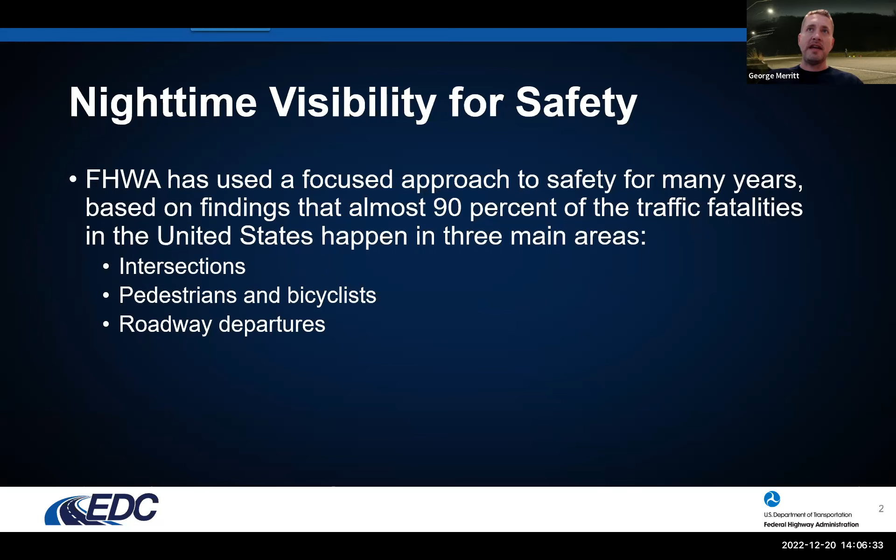I wanted to quickly highlight what we're trying to accomplish, hoping to get engagement from folks on this webinar. The Nighttime Visibility for Safety Initiative addresses another part of the roadway safety problem. Federal Highway Administration has a focused approach to safety, concentrating on three main types of safety problems: intersection safety, bicyclist and pedestrian safety, and roadway departure safety. Combined, these account for about 90% of all highway fatalities in any given year.

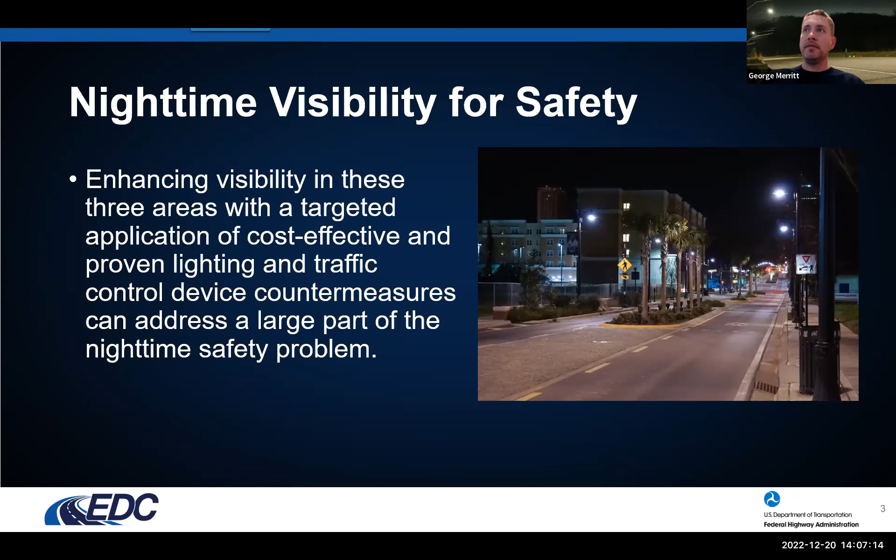This initiative is trying to come up with cost-effective and proven strategies to improve safety in all three areas. We're going to be very targeted, ranging from additional or enhanced traffic control devices all the way up to targeted lighting solutions, taking advantage of modern technologies in roadway lighting for specific environment conditions. We believe improving visibility along corridors, at intersections and pedestrian crossings, will help reduce nighttime fatalities, particularly for bicyclists, pedestrians, and other vulnerable road users.

We are really trying to get these kinds of strategies and countermeasures out there, ones that will be low cost in most cases and relatively easy for any agency to apply in a specific location where the risks might be higher.

It's taking place February 14th through 16th. The website is a little tricky to find on Google, but I strongly encourage anyone with an interest, particularly in nighttime visibility, to register. If you're not already working for a state Department of Transportation, we'd really like to encourage you to reach out and work with your state, as well as collaborate with Federal Highways through the EDC 7 initiatives.

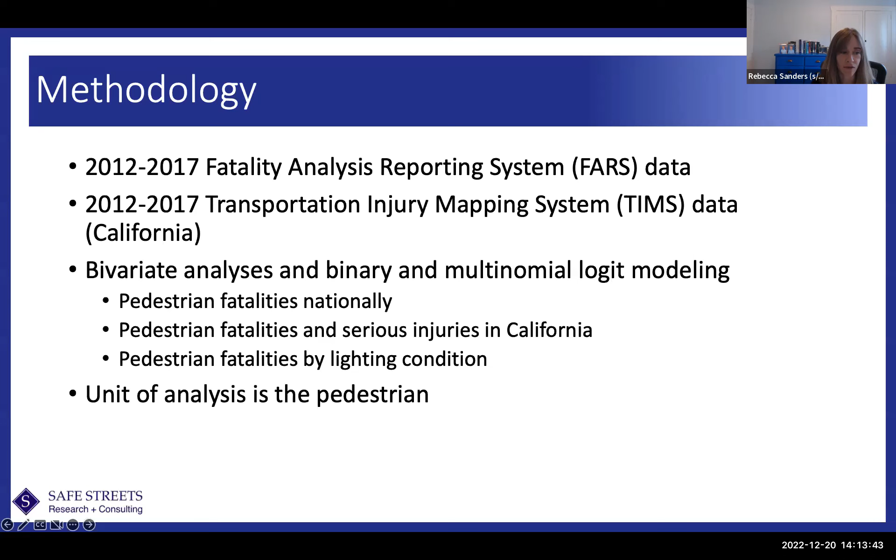And then for pedestrian fatalities and serious injuries in California, using that TIMS data, we also did those models separately to look at whether there were differences between the two, or whether it was pretty consistent when they were pooled. We also looked at that FARS data by lighting conditions, in comparison to a baseline of daylight: dark lit conditions and dark unlit conditions. For all of these, the unit of analysis was the pedestrian.

So just getting straight to the findings, we found some pretty strong, significant correlations with darkness and characteristics of roadway design.

For roadways with 4 or more lanes compared to roadways with 3 or fewer lanes—a variable only available in the FARS data, which is why there's a US after it in the parentheses—fatalities were 1.2 times as likely to have occurred in darkness as compared to daylight.

State highways, a variable only available in the California data: fatalities associated with state highways were 2.1 times as likely to have occurred in darkness as those in daylight, and for serious injuries, it was 1.8 times as likely.

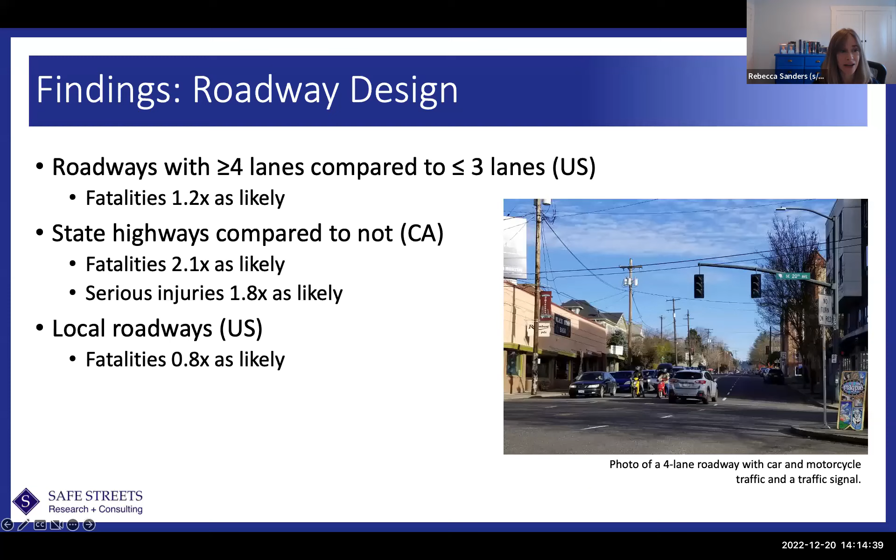Keeping with that trend, local roadways were less likely to have been associated with fatalities that occurred in darkness versus daylight. That makes sense based on what we know about design and speed, but it's also nice to see that our results are consistent.

In that same vein, we looked at speed limit and speeding, and it's important to distinguish between the two. I think we often think of speeding as an erroneous behavior we need to address, and it definitely is. But what we found is that the results were actually stronger when we just looked at posted speed limit, which is not a behavior—it's part of our operational design.

Compared to 25 miles per hour, fatalities that occurred at 30 to 35 miles per hour were 1.5 times as likely to have been in darkness versus daylight, and that increases when we look at those that occurred at 40 miles per hour. This was one of the areas where, looking at lighting conditions—dark lit versus dark unlit—we saw a very high odds ratio for those fatalities at a speed limit of 40 miles per hour or higher in dark unlit conditions in particular. So speed limit matters, and the way we design our roads matters.

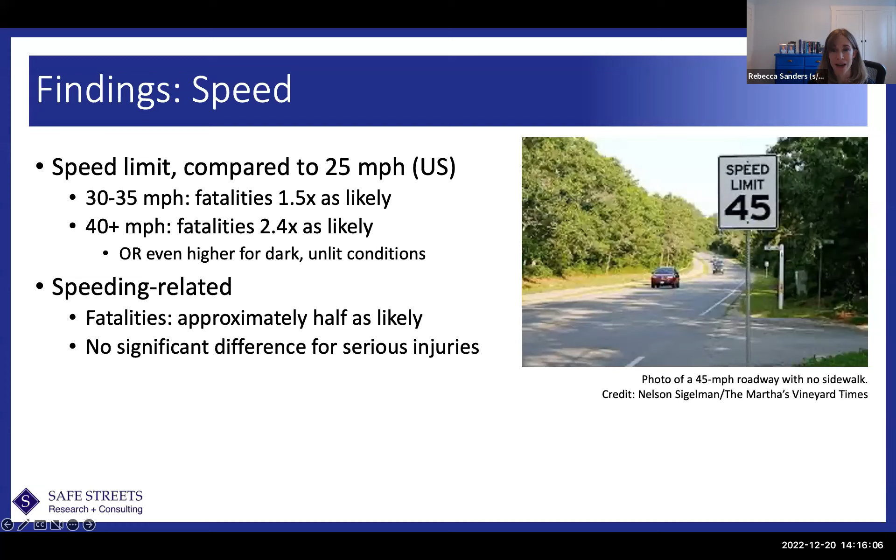Speeding does also matter, but we did not find a significant difference for serious injuries between speeding-related crashes that occurred in darkness versus daylight. Actually, we found a lower likelihood of those crashes having occurred in darkness. Again, this doesn't mean speeding doesn't matter—it does—but our speed limit matters quite a bit, and the way we design our roads matters quite a bit.

We also looked at other parts of operations, such as having a functioning traffic control signal versus not. This variable was only available in the TIMS data, and we saw that a functioning traffic control signal, when associated with a fatality or serious injury, was actually associated with a lower likelihood of that having occurred in darkness versus daylight. There's some sense in that, in a couple of ways.

First, remember that all of these are multivariate models, so this is after we've controlled for all the other things that might have mattered more or less. A key aspect of darkness seems to be, surprise surprise, we just can't see as well. And when we can't see as well, we cannot detect information as quickly and cannot react as quickly. So if you're forced to slow down because of a traffic control device, that actually allows you to detect and react more quickly—making it less likely to be associated with a fatality or serious injury in darkness.

We also looked at whether the crashes occurred at an intersection. We did not find a significant difference between fatalities, once we controlled for all the other factors, in darkness versus daylight, though there was a marginally significant difference there for serious injuries.

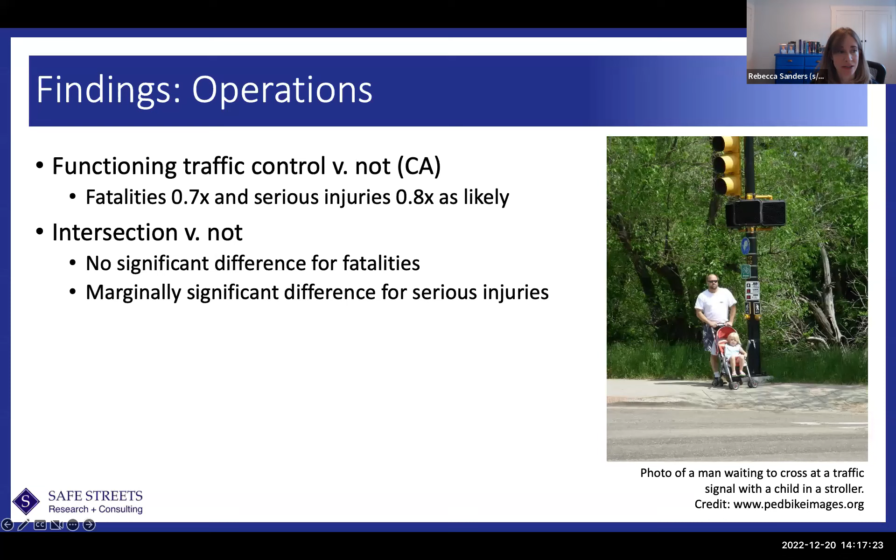In keeping with the same train of thought, we looked at driver movements, particularly drivers going straight versus turning. For all of the models, we found a highly significant association between the driver going straight and a greater likelihood of the crash having occurred in darkness versus daylight. This makes sense to me from a visibility standpoint—what signs are you getting to slow down? When turning, you're forced to slow down somewhat. When driving straight, if nothing else tells you to slow down, you won't, and you may be going too fast for conditions, even though as a profession we design those conditions, and you can't detect and react in time.

We also looked at pedestrian location and behavior. In particular, we looked at pedestrians crossing not in a crosswalk versus in a crosswalk.

Specifically for California, there's another level of that variable looking at whether the pedestrian was in the roadway versus the crosswalk. In both cases, we found a significantly higher likelihood of the fatality or serious injury having occurred in darkness when the pedestrian was not in the crosswalk, or in the roadway as compared to the crosswalk. Thinking about where crosswalks tend to be located at intersections, or other things helping to influence the driver to pay more attention there, there seems to be some protective effect, although this needs to be further investigated.

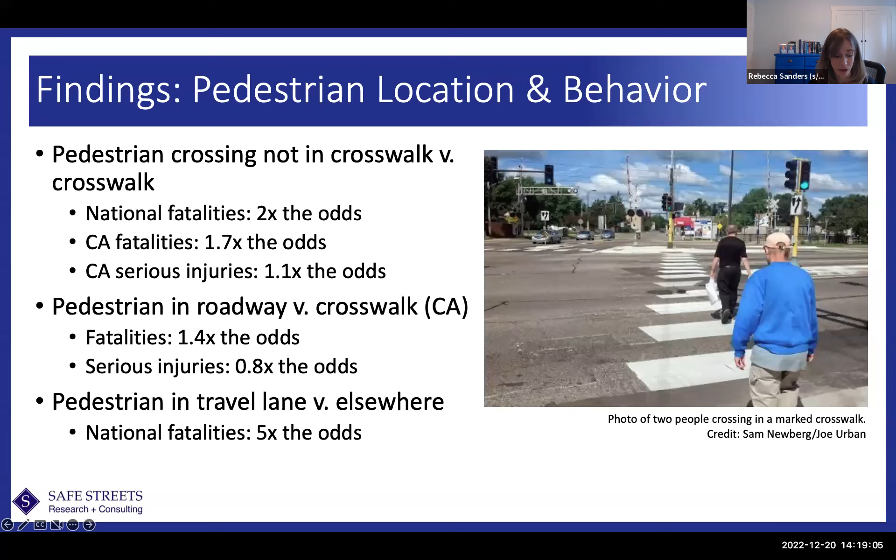In the national data, there is a variable that looks at whether the pedestrian was in the travel lane versus elsewhere or in the roadway. If the pedestrian was in the roadway, that is associated with a much higher likelihood of the pedestrian having been killed in darkness versus daylight.

Other pedestrian and driver characteristics showed up as significant in the model, and we think these are often really related to exposure. Compared to a baseline group of age 16 to 64, pedestrians younger than 16 or equal to or greater than 65 were much less likely to have been associated with a crash, fatality, or serious injury that occurred in darkness as compared to daylight. That makes sense when we think about who tends to be out in darkness, right? It's not generally our younger kids, and it's not generally older folks, who there's a lot of safety guidance saying it's harder to see at night, it's better to not be out. That's not the case everywhere in all places, but in general, that is what we see from the model.

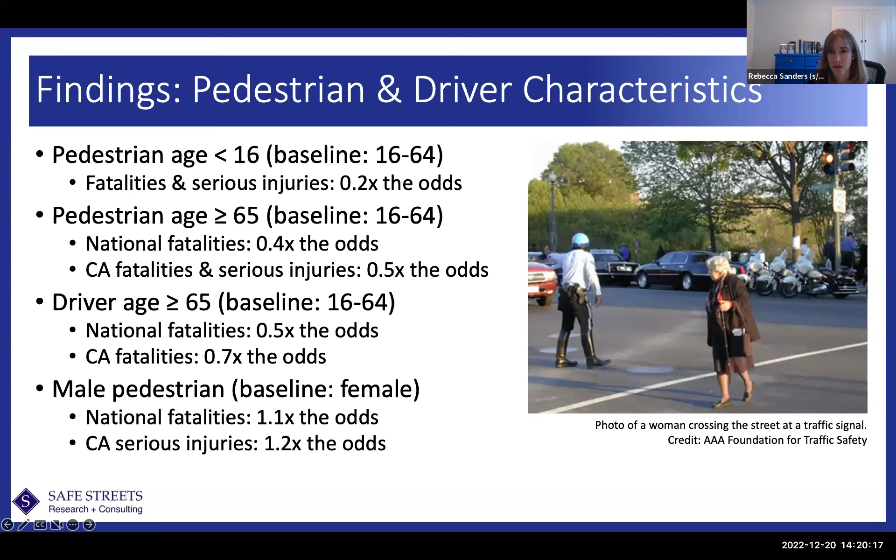A similar result for drivers age 65 or older — they're less likely to be associated with a fatality that occurred in darkness as compared to daylight. Male pedestrians, the same thing: compared to female pedestrians, males were significantly more likely to be associated with a fatality in darkness versus daylight at the national level. We did not find a significant difference in California for fatalities, but we did for serious injuries. Again, a lot of that is probably exposure related.

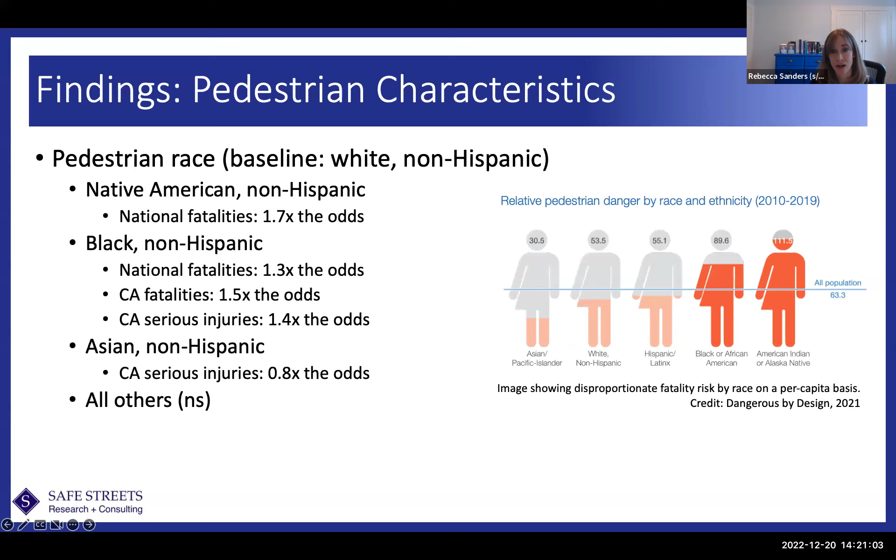We also looked at pedestrian characteristics in terms of race, and this is not a new finding — others, such as Dangerous by Design and other research, have found that some groups in our society are at significantly greater risk of being involved in a traffic fatality than others. Particularly in darkness, we saw this with Native Americans and Black non-Hispanic Americans compared to white non-Hispanic Americans. Those pedestrians who were killed — Native Americans and Black non-Hispanic Americans — were significantly more likely to have been killed in darkness than in daylight. We saw a maybe counterintuitive, or opposite, trend among Asian non-Hispanic pedestrians in California, for serious injuries only.

We also, as you might not be surprised to hear, found a significant correlation with alcohol usage, both on the part of the pedestrian and the driver, as well as with hit and run. All three of those being more likely to have been associated with fatalities and serious injuries in darkness as compared to daylight. Again, there's some exposure and collinearity happening here with the fact that alcohol usage is higher at night, and hit and runs are associated with alcohol usage as well. So we're seeing some of this just being an overlap — this is more likely when that behavior occurs. Nonetheless, it's still important for us to understand it as part of the puzzle.

We also saw a negative association with crashes and fatalities that occurred in clear weather, for those that occurred in darkness versus daylight. This makes some sense, right? If you're driving at night and it's dark, it's hard enough to see.

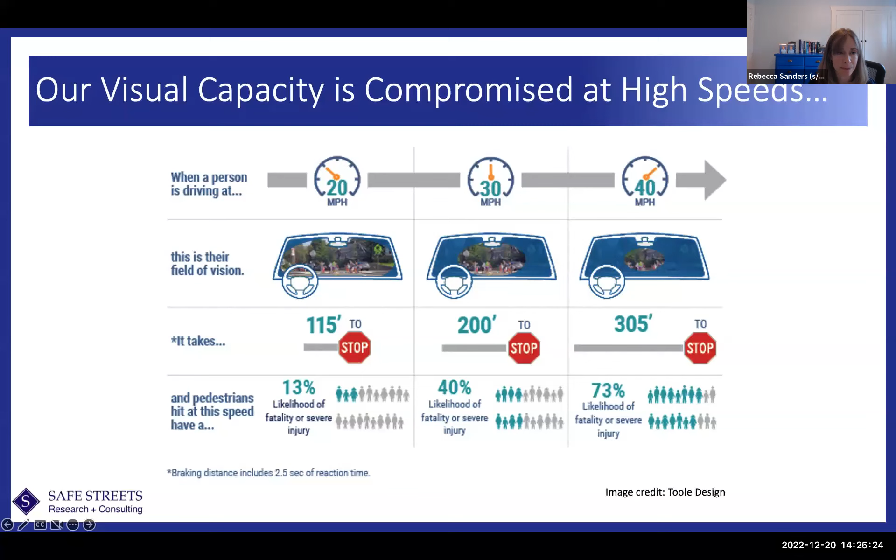And this tends to be even more the case in darkness. 90% of our information intake is visual, and essentially at night we are driving with a curtain around our eyes. So we are really missing that critical peripheral vision information that can come in daylight but can't come in darkness, except for, as we'll hopefully hear later in this presentation, how lighting can mitigate that loss for us.

So some key takeaways for us: we need to adapt practices to treat pedestrian safety specifically at night. We need darkness to be a use and design case, if not the use and design case, because it is when the vast majority of pedestrians are being killed. We need to really understand what we can take in at various speeds and lighting conditions, and then design for that, because when we design for daylight, we are really not designing for the time of greatest harm for pedestrians.

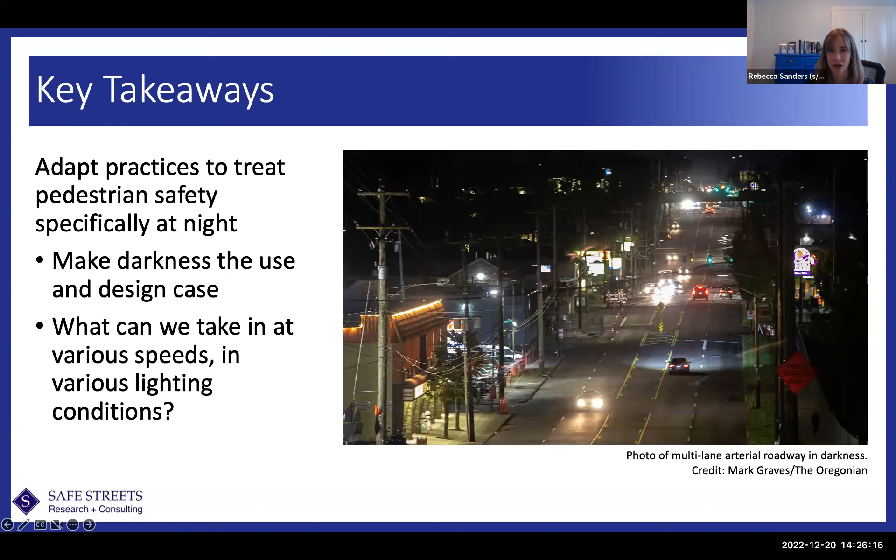We need to prioritize reduced speeds. This is critical. Even with all the lighting in the world, if you do not have time to detect and react, you will not be able to stop the crash. So that reduced speed aspect is really critical to improving pedestrian safety.

But increased visibility is also critical. We need additional roadway lighting, we need better roadway lighting, and we need high visibility countermeasures. Along with that, we need improved crossing opportunities. Even though the intersection variable didn't show up as significant in our multivariate model once we controlled for everything else, we do know that the majority of pedestrian fatalities occurring in darkness are occurring at mid-block locations.

So we need improved crossing opportunities with high visibility countermeasures that will tell drivers to slow down and or completely stop so that someone can get across safely.

NTSB did a great pedestrian safety report a few years ago, and a few of their recommendations are really relevant here: that we need additional vehicle-based safety countermeasures, adaptive headlights. We need to rethink vehicle design. We need collision avoidance technology. We need to rethink infrastructure planning, including pedestrian safety action plans and design guides, to explicitly include darkness as part of that, and site-specific planning.

I would include in this that there is a responsibility we have as communities, that when we design places for nighttime activity, particularly if alcohol is involved—I live in Portland, Oregon, we have a very strong microbrewery culture here, for example—we have a moral obligation to do more to ensure that people have a safe way to get home.

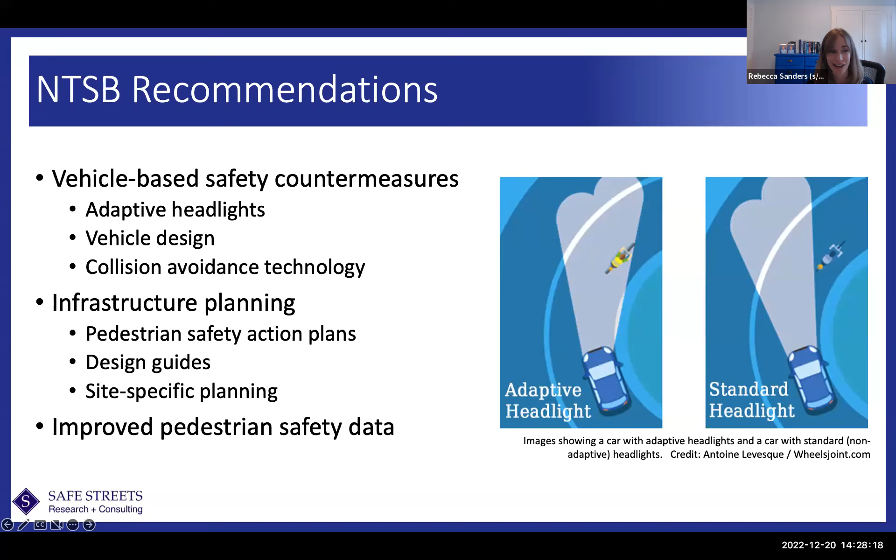But I do want to emphasize that these have to occur in addition to the roadway and operations changes. These are not the answer alone.

And then finally, I do want to reemphasize that we want to explore some of these trends that we saw according to race, age, and sex. For example, this is not an exhaustive list: really understanding lighting effectiveness according to various skin tones, looking at countermeasure effectiveness for people of different body types and sizes—for example, people in wheelchairs or shorter people like our children—and then understanding the impact of glare on visibility and vision for both pedestrians and drivers of different ages.

I was dismayed to learn that my vision has already degraded so much from when I was just in my early 20s. Even if I show up fine at the doctor's office, our vision is degrading over time in a way that I think we don't acknowledge as a society, and it shows up more so at night.

And then finally, there is ongoing research on this topic. NCHRP 17-97—I'm the research director for that project with Safe Streets, but we're partnering with some amazing folks, including folks at Toole Design, the University of Wisconsin-Milwaukee, and Oregon State—to do a really holistic multi-methods investigation of pedestrian safety in darkness, including crash analysis, focus groups, driver simulation, and practitioner interviews, with the goal of providing guidance that's specifically tailored to improving pedestrian safety in darkness.

So thanks so much for your attention, and I would be happy to answer any questions in a later time, and just really appreciate y'all being here.

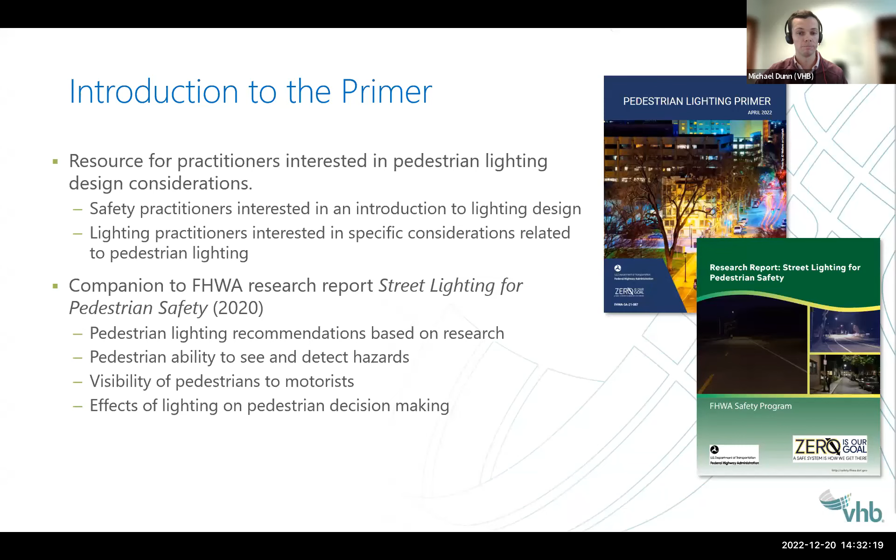So the primer is a companion to the Street Lighting for Pedestrian Safety research report that FHWA released in 2020. That report provided some recommendations for lighting for pedestrian safety, particularly related to children and safe routes to school programs. It considered a pedestrian's ability to detect hazards on walkways, the visibility of pedestrians to motorists, and also some impacts that lighting can have on pedestrian decision-making on whether or not to cross a roadway. So the goal of the primer is to highlight how the results from the research report can be used to complement common lighting design guides.

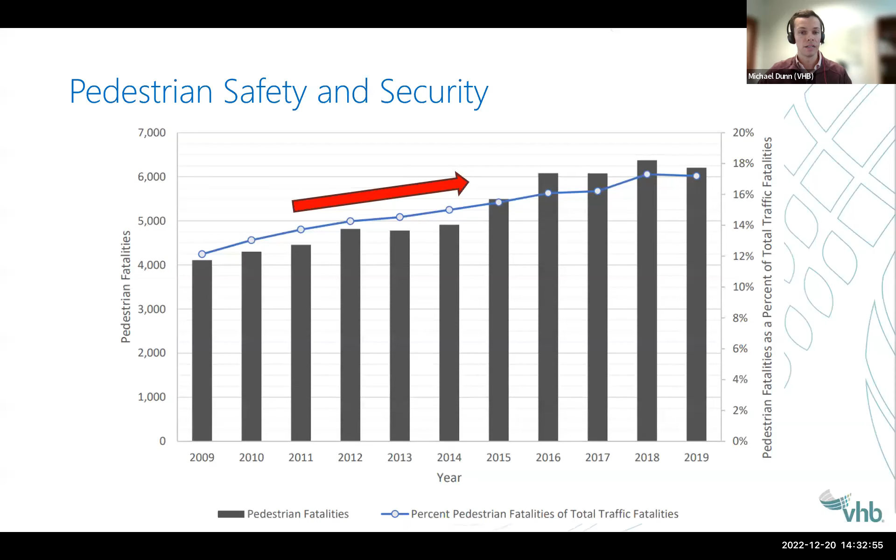As that graph showed, 76% of pedestrian fatalities in 2019 occurred in dark conditions, and this was an increase from 69% just 10 years before in 2009. The increase is certainly notable and important to pay attention to, but it becomes even more compelling when you realize that only around 25% of traffic volume occurs during dark conditions.

This means that most of our pedestrian fatalities are actually occurring during the time of day when fewer vehicles are on the road. Additionally, crash statistics show that minority communities, as Rebecca also communicated, experience a disproportionate burden of the pedestrian fatalities in dark conditions.

In addition to these crash safety concerns, dark conditions can also have negative effects on what we call in the primer pedestrian security. So this would be issues related to crime and also perception of personal security. Since dark conditions reduce visibility and recognition, they create additional blind spots. They can increase that level of personal risk, whether it's real or perceived, and also increase fear. Women in particular report experiencing fear at night that actually constrains or affects their travel behavior.

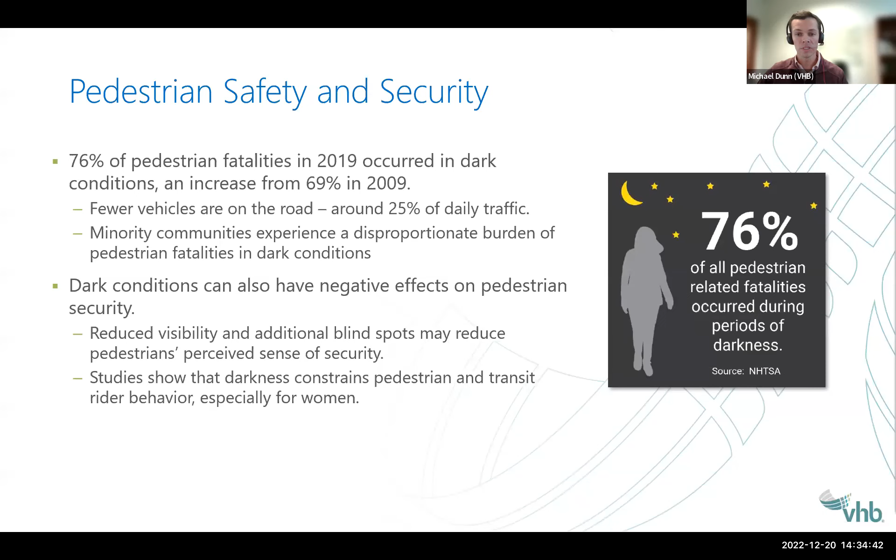And the range depends on the crash severity that you're interested in, as well as other factors like urban versus rural and facility types. So you can see, an 81% crash frequency reduction is very significant.

Some studies have also shown that pedestrian safety is influenced not only by lighting presence, but also the quality of the lighting that's provided. One really foundational study was on US 19 in Florida, which at the time actually had the highest pedestrian crash frequency of any road in the country. More than 82% of the nighttime crashes actually occurred on segments that already had lighting. But the researchers found that road segments with lower illuminance levels were associated with higher frequencies of nighttime pedestrian crashes.

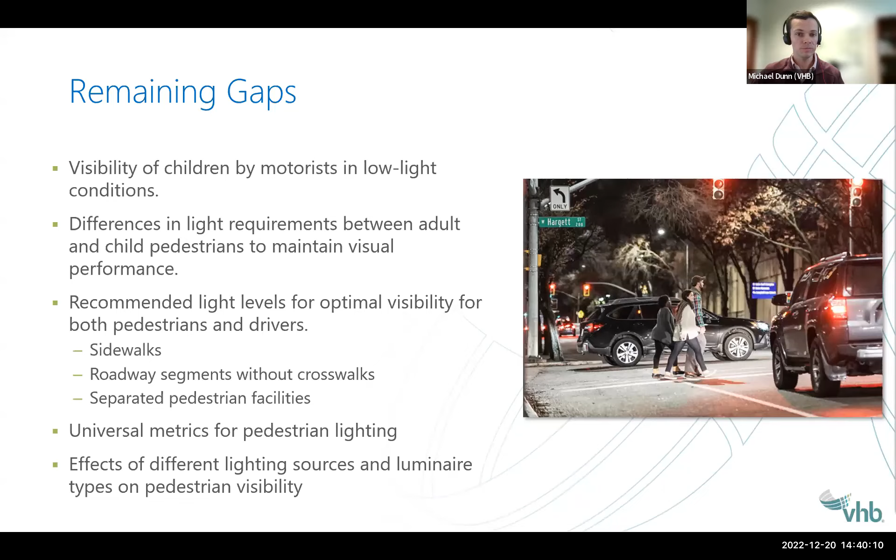I hope that this quick overview of the first portion of the primer really underscores the need for improving pedestrian lighting practices and gave you a good sense of the benefits that improved lighting can have on both crash safety and personal security. I'd encourage you to check out the primer for more detail on the various statistics and research reports I shared if you'd like to learn more.

At this point, I'm going to hand the reins over to my colleague, Matt, to talk you through the lighting design process and, more importantly, the key considerations for designing lighting with pedestrians in mind.

Thank you, Michael. So as Michael shared with you all, a lot of this background research and safety data and existing gaps, that was part of what we consider chapter 1 of the primer. Chapters 2 and 3 dive into more specific applications of how do you design a lighting system, what considerations go into your decision making, what's important especially for pedestrians, and how do we apply that. Chapter 3 of the primer is a specific design example where we illustrate each step in the process.

Now, when the primer addresses design, it's really talking about everything that takes lighting from a plan or a vision to a construction plan on paper. So it also includes concepts like warranting, deciding what design criteria you want to achieve, selecting your equipment and controls. It's not just laying out and designing for foot candles - that's only step 5 of the process. So it's a broad process here that we can walk through.

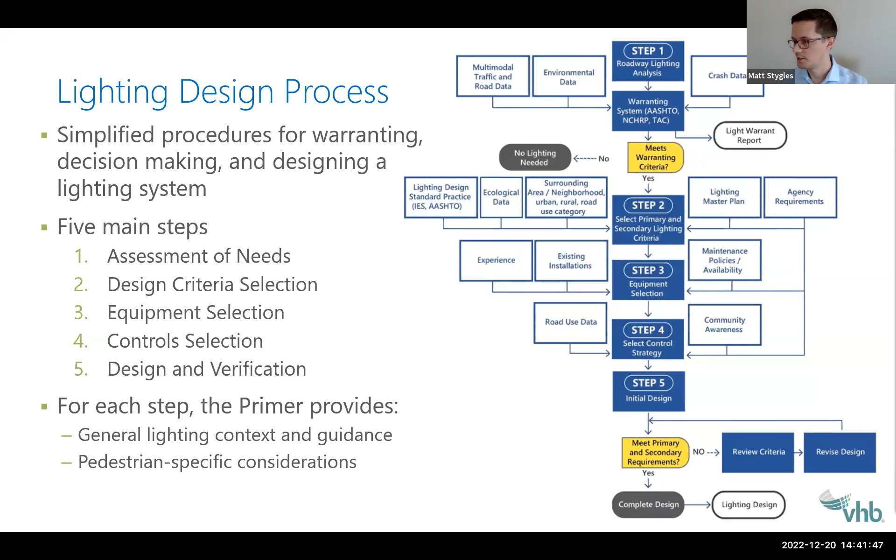Step 1 would be assessment of needs, or what we would consider warranting. There are well-established warrants for most roadway lighting applications, and they tend to come from sources like AASHTO, IES - the Illuminating Engineering Society - RP8, and NCHRP, which has several reports out that can provide guidance for warrants. But when we talk about pedestrian lighting systems, there's not that much guidance out there. That's truly the big gap. Even if you look at the TAC guide from Canada, one of the more robust systems out there for warranting, there's really little guidance in terms of pedestrian facilities.

Often it's case by case, and what agencies can do is we would encourage you to engage the public, especially in an equitable way.

We participated in a STEP scan tour in 2021 - that's the Safe Transportation for Every Pedestrian program from FHWA. There were 6 state DOTs that participated: Colorado, Florida, Idaho, Maine, Minnesota, and North Carolina, with participation from FHWA as well. So a pretty good footprint across the country.

What we really found is the methods these state DOTs are using to justify pedestrian lighting range widely by region, climate, and funding ability. All of these things may play a role. What we came up with during that discussion was a group of factors that most frequently come up when agencies are making decisions about pedestrian lighting that might guide your decision.

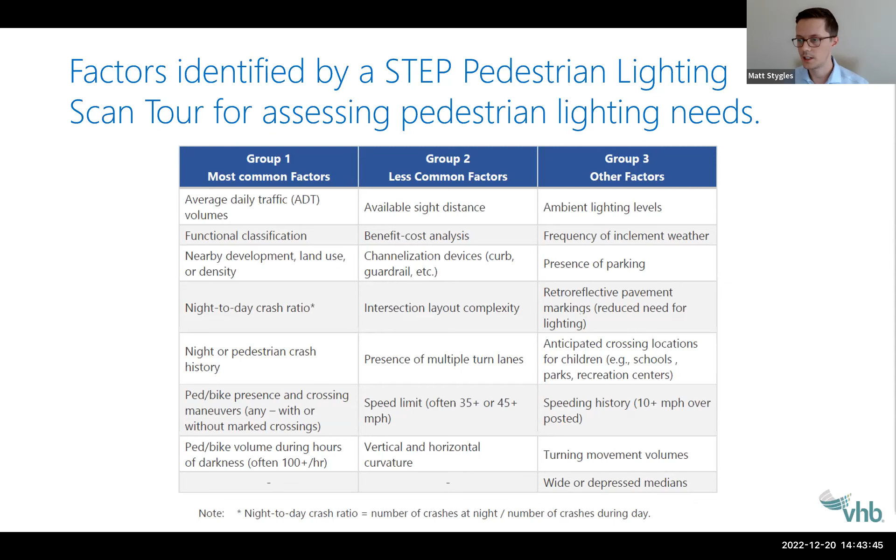Tapering down to groups 2 and 3, which occasionally come up but really just provide more peripheral context for your decision. So these tools on the screen are not meant to be one size fits all. They're just tools available in the absence of other guidance that doesn't really address pedestrian lighting very well. We're continuing to trend towards more specific and prescriptive guidance.

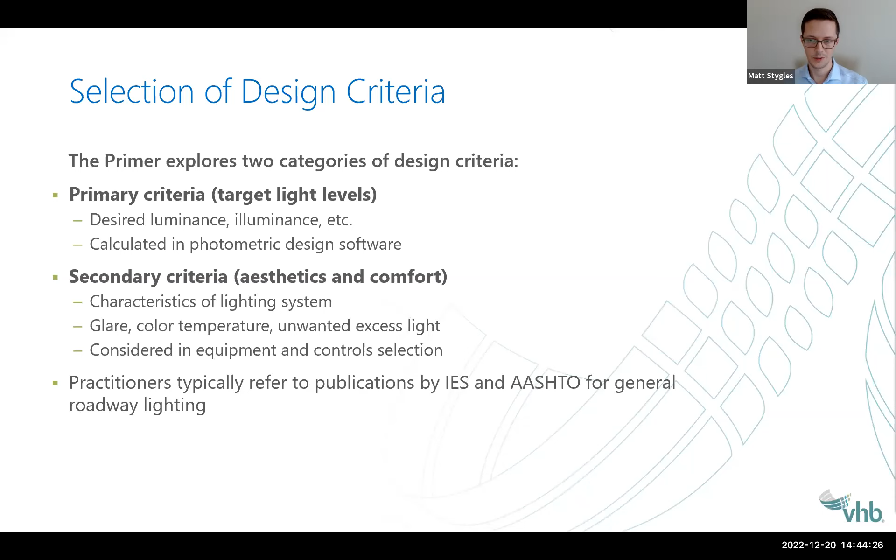Step 2 of the lighting design process would be selecting your design criteria. The primer considers 2 main categories of design criteria. The primary criteria is your target lighting levels - what you want to shoot for when laying out your luminaires. Most frequently we talk about luminance and illuminance - there's a slight difference between the two, but those are your lighting levels, and that's what you calculate in software. There's also a second group of criteria, which focuses more on the aesthetics of the system, comfort of road users and pedestrians, and efficiency of the system overall.

So on this primary design criteria - briefly, so we all understand - luminance is a measure of how bright a surface is perceived to be, especially by the road user or a motorist. That's measured in candelas per square meter. The other variable we look at is illuminance, and that's the amount of light that might strike a surface.

But when we talk about pedestrians, there's a vertical element that becomes especially important. You could think of it sort of in the same vein as a headlight striking the vertical surface of a pedestrian and lighting up their vertical surface. This is so important to help drivers identify objects in the road, to determine if it is a pedestrian, recognize if it's a threat, if you need to stop the vehicle. Without that vertical component, you really don't have a great system that allows a driver to detect objects in the road.

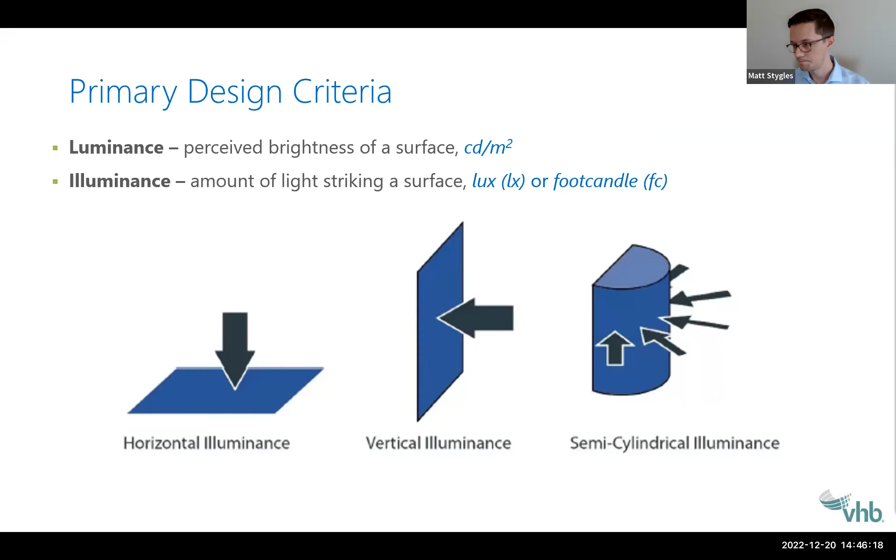So depending on your type of facility, where you may be - if it's a mid-block crosswalk or you're at an intersection, urban or rural - the primer will guide you towards applying some more targeted design criteria.

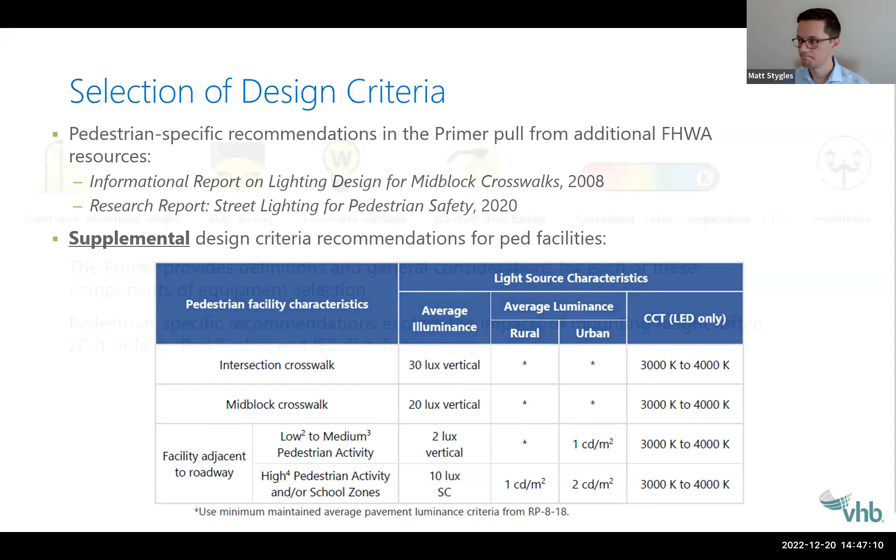We could talk about pedestrian scale lighting, which is commonly under 20 feet in mounting height, versus roadway lighting, which may be more 40 to 50 feet or even higher for interchanges.

BUG rating, which is backlight, uplight, and glare ratings, gives you an understanding of how much light is being wasted away from your target area. That speaks to efficiency of the system, putting light where you want it and not adjacent into residential or sensitive environmental areas, or upward into the sky.

Luminaire wattage is the power input to your light, which controls the lumen output, and that's closely related to all of these variables. So as you work through a design problem, when you change one variable, you might consider changes to all the others as well. Wattage is a commonly adjusted one.

IES distribution describes the shape of light that might be cast on your facility. It could be very linear, round and symmetric, or anything in the middle. Those are variables the designer has to play with.

Color temperature is also a very important topic in recent research. Obviously, research shows that the higher your color temperature, or the more cool and blue the light is, the more it might impact circadian rhythm, animal ecosystems, fauna and flora. So there have been shifts away from that in recent years towards the lower end of that spectrum. This research in chapter 1 also points out a relationship between detection distance and color temperature. If you go too far to the warm end of the spectrum, you might lose some color recognition and detail detection, and you won't be able to recognize a pedestrian quite as far in advance.

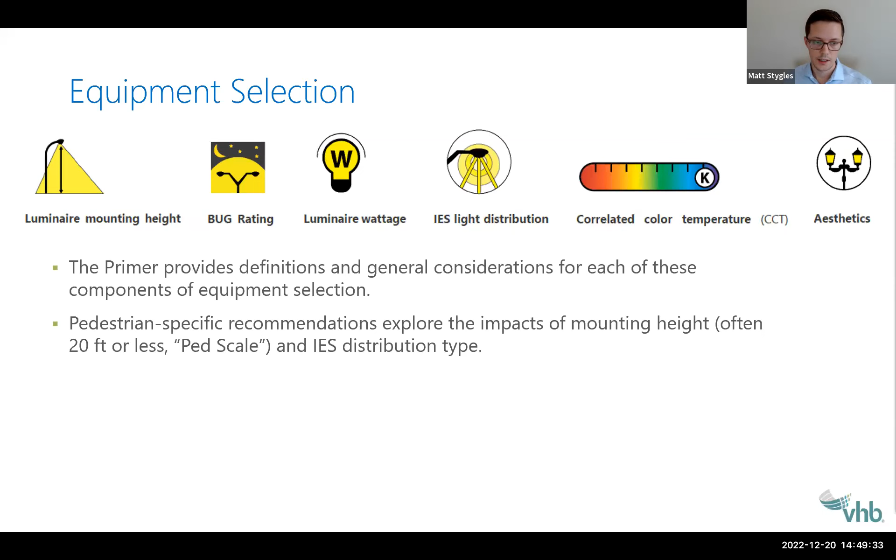So the primer recommends a balance of color temperature between 3000 to 4000 Kelvin, and many agencies are adopting a similar range, trending more and more over recent years into the warmer area. Then there's the overall aesthetics of the system. If you're in a historical area, like a National Park Service site, those characteristics can play into all the other variables as well.

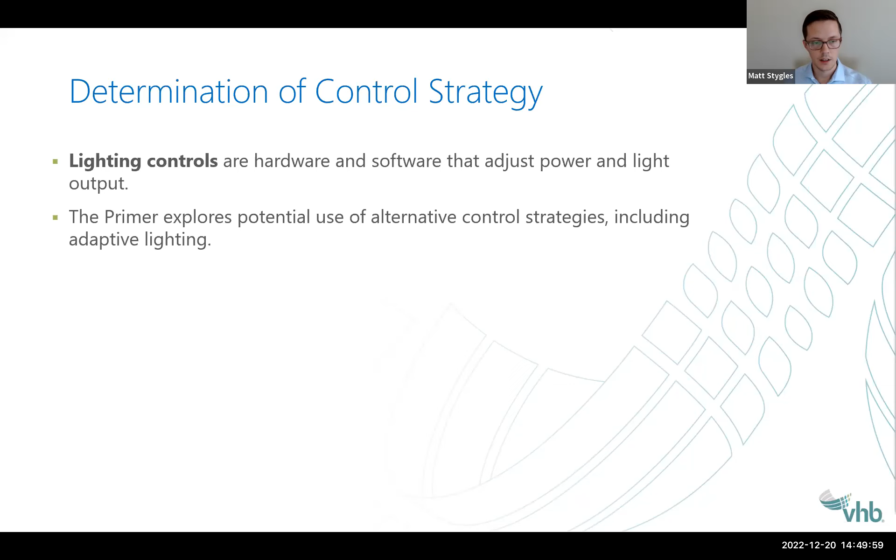The primer discusses control strategy, which might include topics like adaptive lighting. That's the one the primer traditionally explores the most, and it provides resources for the reader to find more design criteria. That really addresses adaptive dimming of the system—when pedestrians may not be there, you can reduce the light output at night.

The final step here would be design and verification, and there's some nuance in this design process. When you use a software system, it will provide the correct values, but there are other considerations designers should be looking at that help produce what we consider a good lighting layout. One example is negative positive contrast.

Pole locations are very important in the design process. We want to encourage pole locations that are in advance of pedestrians, which will light up their front surface and assist with detection distance as well.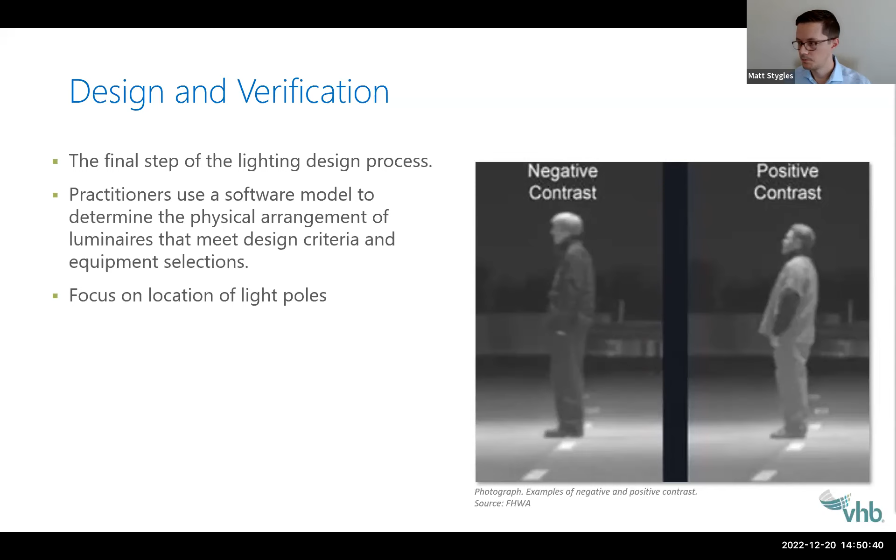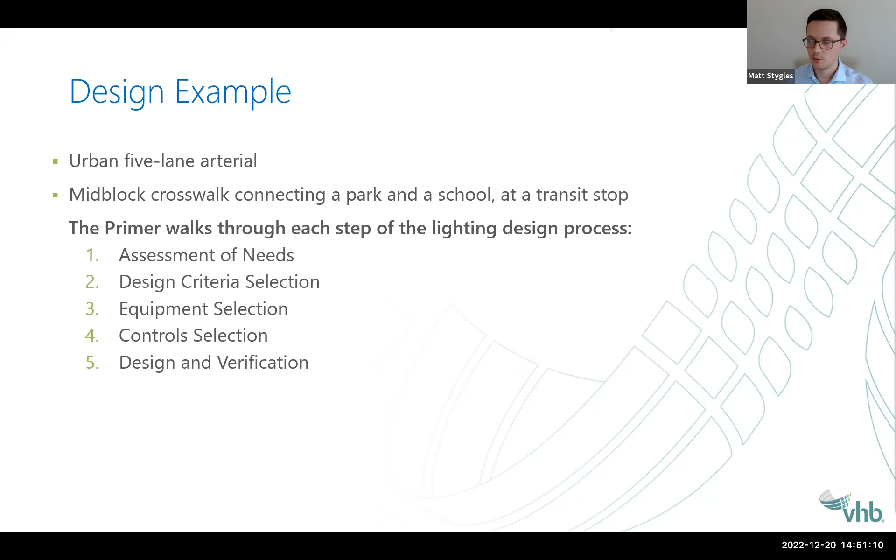Chapter 3 of the primer provides a brief design example, and we can quickly walk through it. The design example is an urban 5-lane arterial that separates a school and a park, with a transit stop in the way—so lots of pedestrian activity at night. The primer walks through each of these steps and emphasizes the decision-making process, what you might think about specifically for pedestrians at each step.

Again, the key concept I want to target here is the critical pole locations for this design example. When we talk about positive contrast, these are the locations of poles you want to set first. This sets the spacing for the rest of your design and assures positive contrast for pedestrians in the crosswalks at intersections.

When we talk through the 5 steps of the design process, what you don't see necessarily before you get to paper are obstacles like intersections and utilities overhead. Sometimes it can be difficult to place a pole, so we want to make sure we get the most critical ones first. In this example, that would be one at each intersection in advance of the intersection, and one on either side of the mid-block crosswalk.

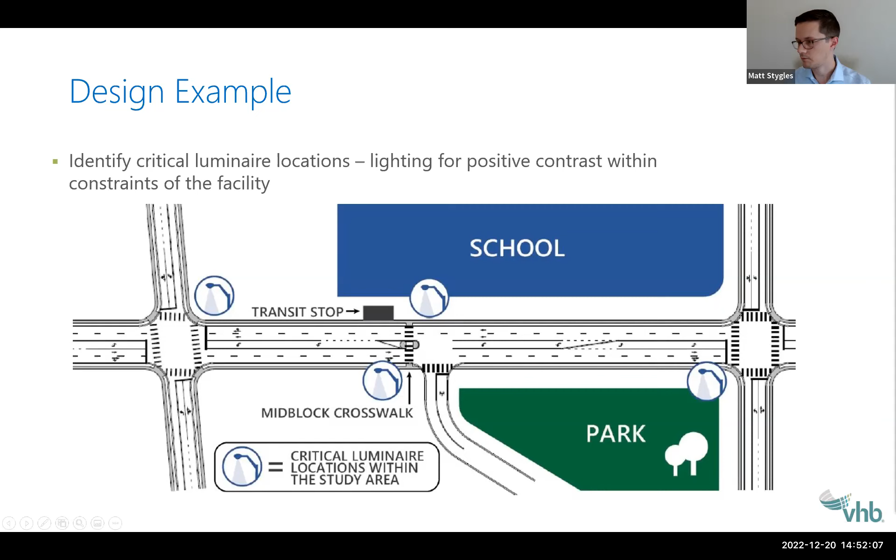If you read through the design example, it might strike you that this is an iterative process. It's not something you do once and come up with a good lighting solution. Often it's many iterations. You might test a layout, check your design criteria, and see that some of it fits while some needs massaging and revisions. For instance, the vertical illuminance component of a design step might not quite meet your target, so the designer goes back and adjusts variables in equipment selection enough times to get a solution that meets all your design criteria.

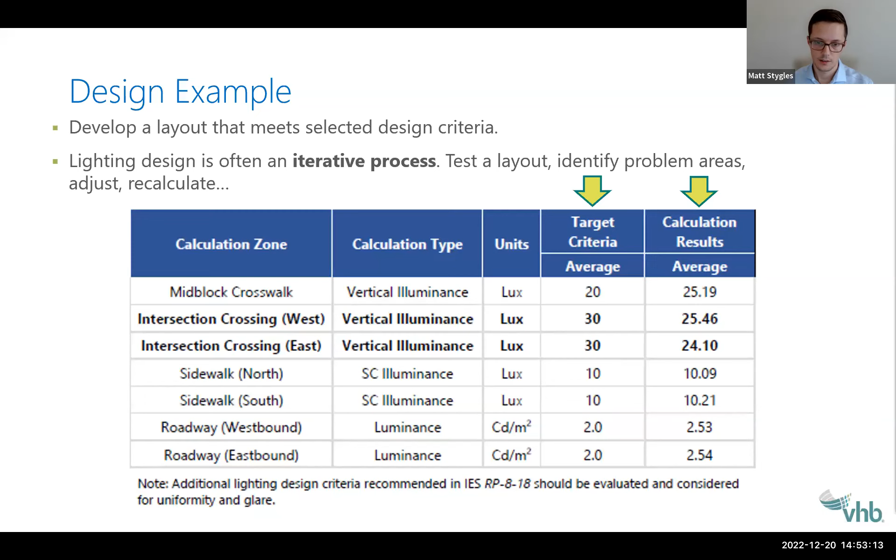So the primer, again, is a tool for managers and planners. It's a tool to help you make informed decisions and understand some of the concepts that go into good lighting design. For more practical designers, the primer provides a way to get the latest research in pedestrian safety right to your fingertips in a practical way, giving you new design criteria to consider when working on a design.

And that was our last slide, but again, look forward to discussion, and please feel free to reach out to Michael and me afterwards if we get a chance. Thank you very much, Matt and Michael, for that information.

I'll have to remember to say primer instead of primer from here forward. I'm not sure why I pronounce it the way I do. Stick with your guns, Dan. Yeah, we'll see. We'll have a showdown here.

Let me now shift our discussion. We've been talking big picture, macro level stuff. I'm excited to bring the conversation to a more local level, hearing about real work being done on the ground by a group in the Portland, Oregon area. We have two panelists here representing Oregon Walks, Brandon Summers and Zachary Lartz, to share some of the work done by that group looking at pedestrian safety as an issue, specifically focusing on some of these lighting topics we've been discussing. So please, gentlemen, go right ahead whenever you're ready.

Great. Hey, just let me know if you can see our slides. Looks good. Yes, as well. All right, great. Awesome.

Great. Hey folks, we're Oregon Walks, a pedestrian advocacy organization based in Portland. We do most of our work in East Portland, in traditionally disinvested communities. We do a few different things: policy presence, advocating in the halls of City Hall at the regional and state level, and hosting walks where we find partners and get on the street with people. Sometimes you just need to hold each other's hands and hit the streets, showing people how to be there safely and build social community. We also work in education, teaching people how to access their walk shed—the spaces they can reach by walking instead of getting into a car to complete an errand or see a friend.

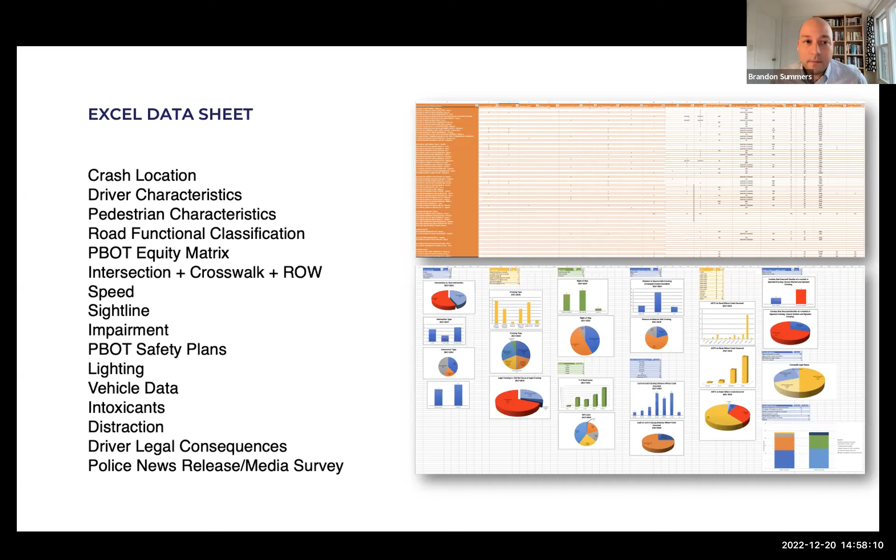Publicly, we put out a 3-part report: one section on crash reviews for the 48 crashes, summarizing infrastructure issues and crash facts; a facts and figures report with all the graphs and tables pulled aside in a presentable way; and then focus issues that look more closely at things like transportation equity, homelessness, distraction, enforcement, and even vehicle type and size.

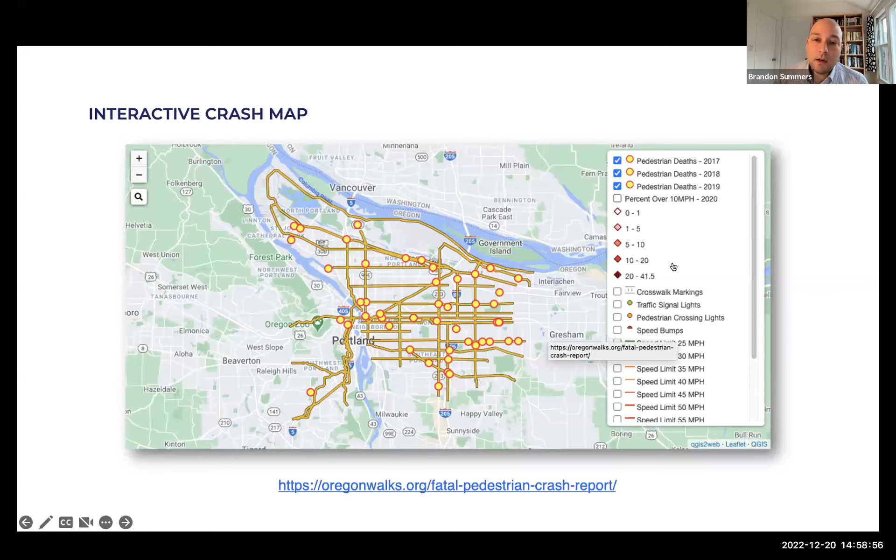It all lives on OregonWalks.org. The reports can be downloaded. There's also an interactive crash map where at every one of the fatal crash locations, you can click on one of the dots, it pulls up the data in a table on the right, and you're able to click through to the crash review related to that location.

This is an example of what a crash review looks like. There are 3 panels. The first paragraph is a brief description of the location's infrastructure and related facts. The second paragraph takes a look at the pedestrian path and facts. And the third paragraph covers driver paths and facts and a summary of the impact.

In this instance, we can see that Mr. Fuq Chan was crossing from the Chinese Community Center to 113th and Southeast Division, which is in East Portland. We'll learn the significance of that later. He was struck on the south side of the road while walking to his car by a vehicle traveling eastbound.

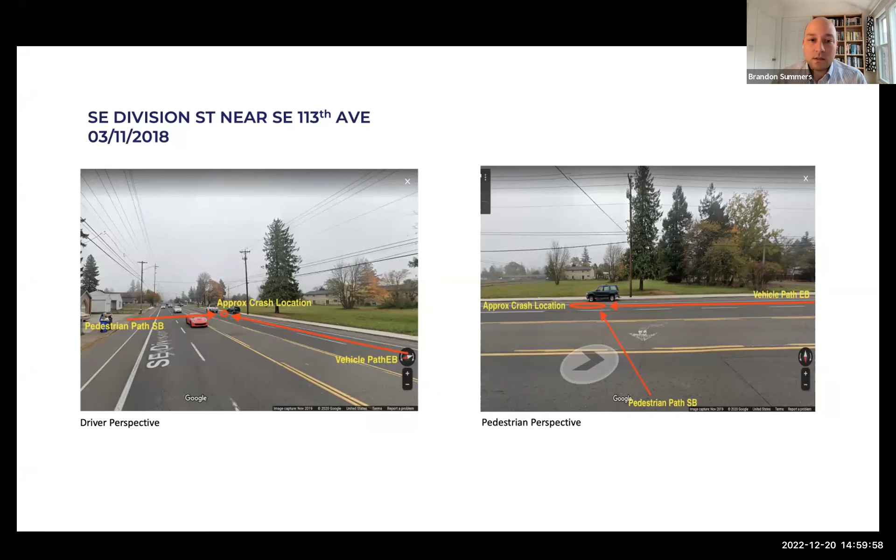The second slide for the crash reviews has as close as we could get to a driver and pedestrian perspective using those Google Street Views, just to see, on the ground level, what this crash may have looked like. Of course this is approximated, we had to do the best measurements we could from police report descriptions. The third panel is a summary of crash location infrastructure issues.

In this instance, what we see is a lack of traffic calming. There are nearly 1,800 feet between signals, so there's nothing to really slow vehicles down. We've got a wide 5-lane arterial, and data from Portland Maps showed that 77.8% of drivers exceed the posted speed limit of 30 miles per hour, with 766 daily going 40 miles per hour. This is a big takeaway, not just for this location but overall: on these arterials, people are speeding too much, and that's causing a lot of these crashes.

To tie in with the more lighting-specific focus of this webinar, this location did have a lighting issue. The way we were able to look at lighting was that Portland provides Appendix K guidelines as part of the PED-PDX plan that came out in 2019, looking to the future of construction, giving guidelines for average maintained foot candles and a uniformity ratio.

We didn't have the capacity to hire an engineer to go out to all 48 of these locations. We took a look at a few of them with an engineer we were able to partner with, and the hunch that we had about lighting inadequacies was confirmed at all the locations.

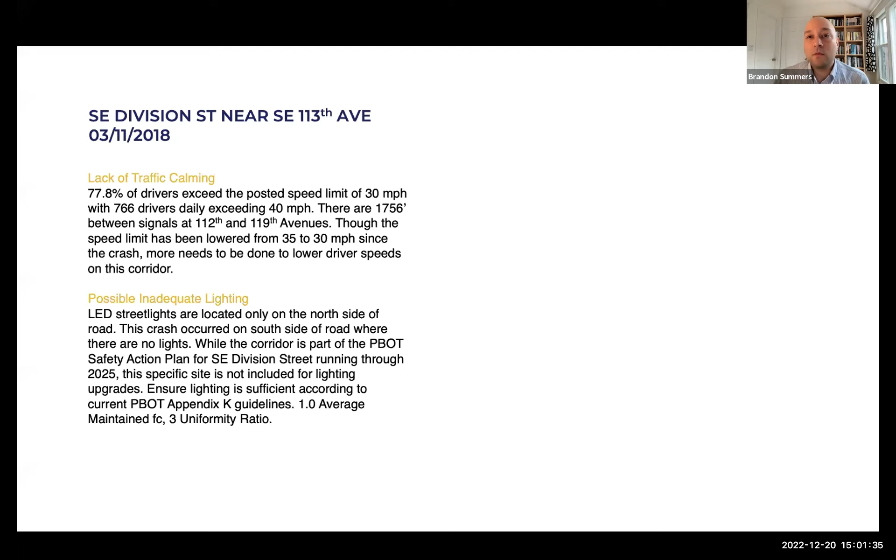So what we do is we use this street view data to see if there are any, pardon the pun, glaring lighting deficiencies. In this case, there are lights only on the north side of the road. There's 150 feet between them, and Mr. Chan was hit on the opposite side of the road where there were no lights.

So I'll zoom out a little bit, tell you a little bit about the Oregon Walks findings on a bigger level, and then we'll take a look at the findings related to darkness and lighting specifically.

So this is very important. We looked at the location of our crashes, and we found that there is a very distinct dividing line, as Zachary will talk about later, between what's known as East Portland and West Portland, or the rest of Portland. 82nd Avenue and everything east of 82nd Avenue are traditionally underserved. We have a higher number of people of color, lower incomes, and we found that 50% of the crashes occur there. When you adjust them for deaths per 100,000, it's more than double those west of the city.

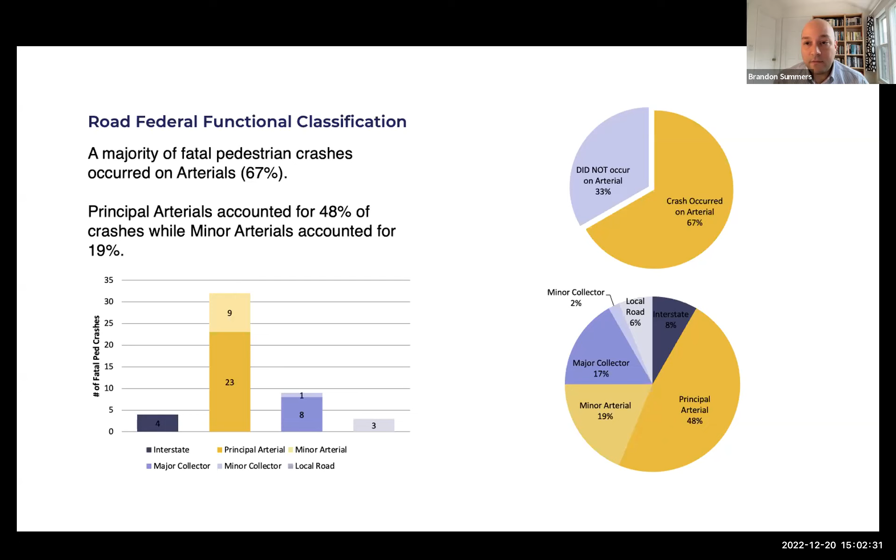And as I was saying before, we have these crashes occurring on, not surprisingly, arterials, 67% of them in East Portland at that, and 4 or 5-lane roads.

We did take a look back at distraction data just to allay those concerns. It's tough to get the data on that. Police reports often leave it out or just don't check the box for it, don't think about it. But in the 26 crashes where we did have an analysis of distraction for the pedestrian and the driver, none of the crashes, according to police, occurred because of distraction.

So focusing in on a lighting review, again, in the absence of being able to go out and make these foot candle measurements, we looked at Google Street View to look at long distances between street lights, looked at the police report for any note of lack of functioning lighting, or if they wrote somewhere in the report that the area was not lighted, if there's any language like that.

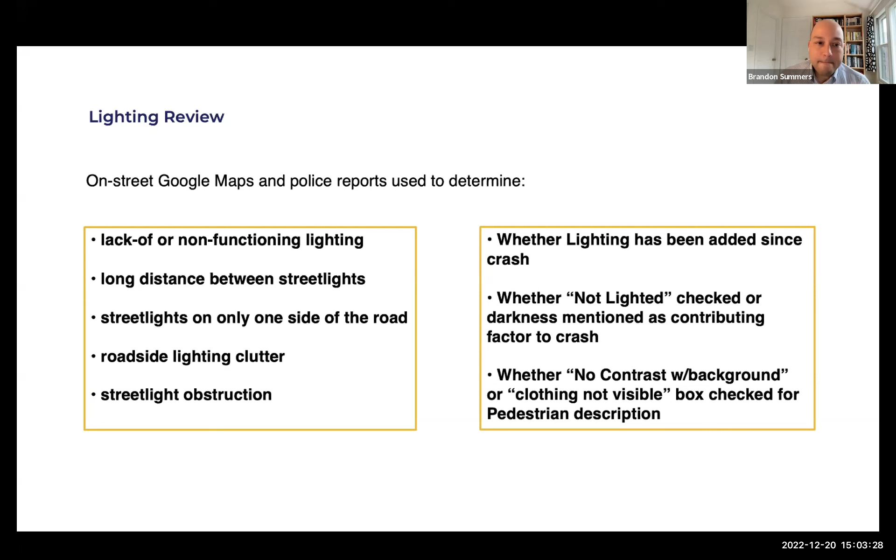And what we found was that on a broad view, 79% of crashes occurred when it was dark. Police only said that 3 of those crashes happened because of dark, not lighted. But when we were able to take a look at the street view and compare some of those PBOT Appendix K guidelines, we found that 58% of the crashes that occurred when it was dark had lighting issues.

And our recommendation was to put these in a report and say, this is as far as we can go with this. Take this information, city, and go out and let's make the measurements there. Let's look at this from a lighting standpoint and hopefully on a more holistic standpoint as well. But at the time of the report's release in 2021, lighting had been upgraded at only 2 sites where fatal crashes occurred, and 21 locations still had unresolved possible lighting issues.

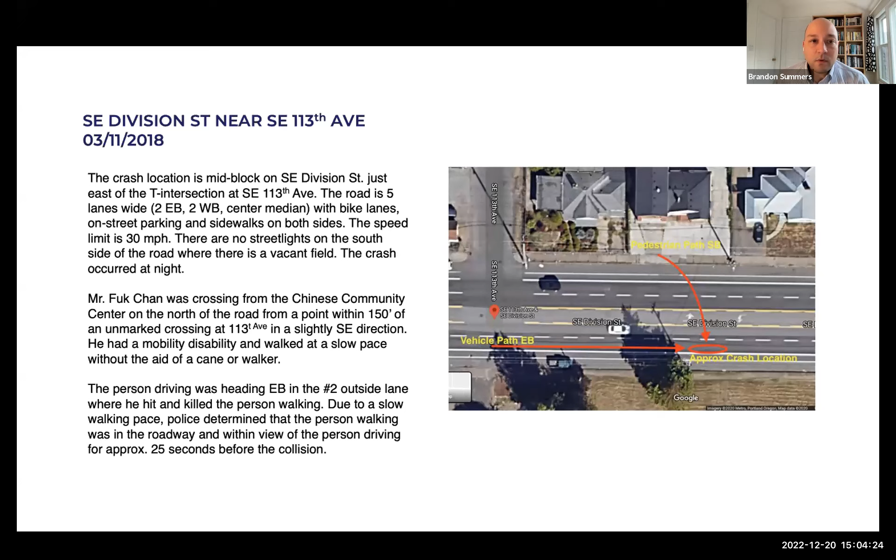And this brings us back to this example that we were looking at earlier of 113th and Division in East Portland. This is a street view of what the street looked like at the time of that crash, at the time when Mr. Chan was killed. We have 5 lanes. There's a signal way down here, 1,000 to 1,500 feet, another one close to 500 feet behind this one. We have lighting on the north side of the road.

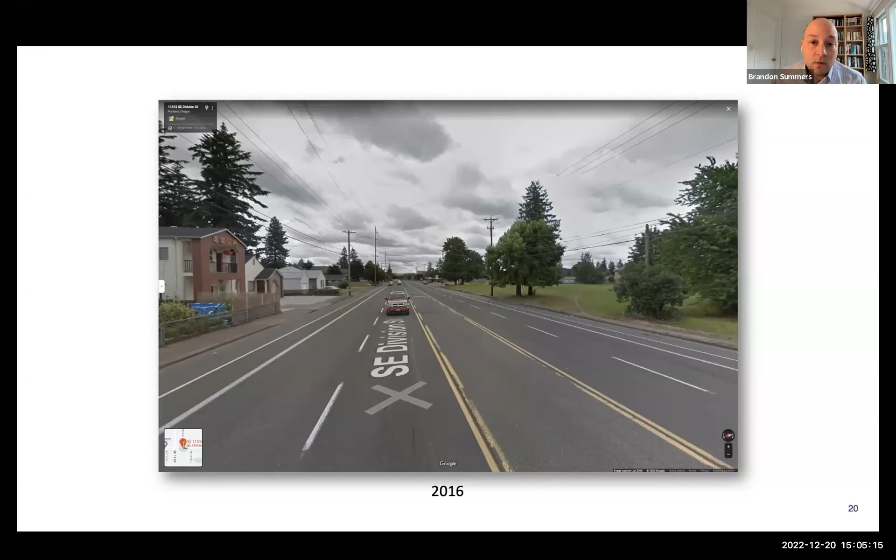You can see a cobra head here, and the other one was just slightly off frame here. And Mr. Chan was killed near this pole with no lighting along the entire south side of the street. We know that this is frequented by pedestrians. There's a goat path here worn through what at that time was a vacant field, leading to some of the housing over there. And it's characteristic of the dangerous road that we all know, an arterial, and oftentimes outside of the city where there's just unmitigated speeds. People can go fast, it's dark, and people are going to be hit.

This brings us to the idea of where these types of improvements are being made and transportation equity. Backing up to this PDX report put out in 2019, PBOT wasn't getting enough response from communities of color, specifically Black Portlanders who primarily live in East Portland. So they held two focus groups to find out what the concerns were.

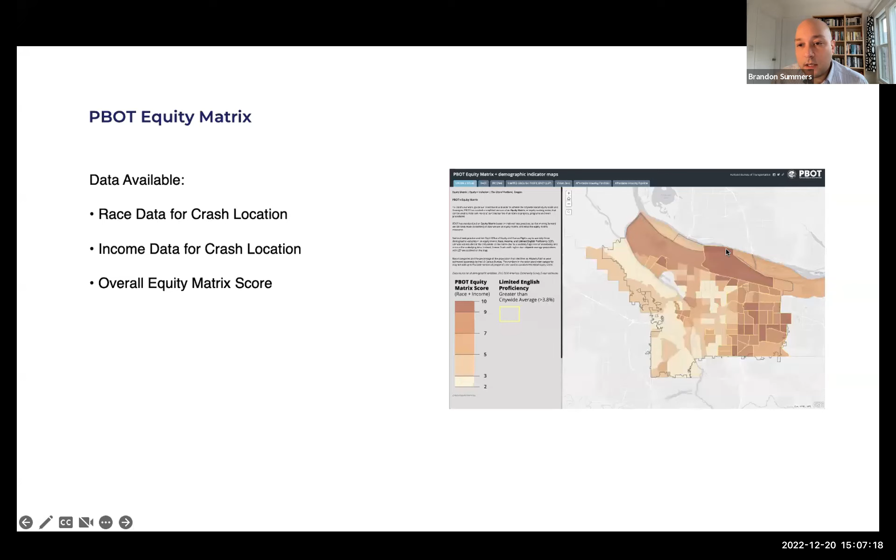PBOT actually has this equity matrix where race and income data are overlaid. If we look on the right, the darker the color, the greater the inequities, and we can see a dividing line pretty distinctly between 82nd Avenue and all the area east, and that area of North Portland. We took all of our crash data and overlaid it on this equity matrix.

There are a lot of findings, which you can view in our report, but as they relate specifically to lighting issues, we found that a majority of the crash locations with lighting issues were located in East Portland, 77%. Specifically, 8 out of 8 of the pedestrians identified as Black were killed when it was dark, and at 7 out of 8 of those crash locations, lighting issues were determined to be a factor. Elsewhere in our report, there's a strong overlay of crashes in general with these trauma-impacted communities in East Portland.

This brings us to an even closer, on-the-ground focus that Zachary will lead us through: 82nd Avenue. Great, thank you so much. So, best for last, anyone? Sounds great, right? So, 82nd Avenue.

I want you to take a pause for a moment and think about this corridor in your community. It's a 5-lane arterial. It has almost no turn management, no access management. So visualize that in your head, because for the next 4 or 5 minutes, I'm going to talk about Portland's 82nd Avenue and some of the efforts happening along this corridor.

82nd Avenue used to be the north-south corridor on the east side of Portland. The suburban explosion happened and it became consumed by the sprawl of Portland to the east. Now if you look at a map, 82nd Avenue is actually dead center of East Portland—it's the core, the central part. It used to be owned by the Oregon Department of Transportation, and over the course of many years of advocacy and funds from a number of different directions, it was jurisdictionally transferred from the state to the city. Now here's this fantastic opportunity where the city has money and resources to transform this space that is currently incredibly pedestrian unfriendly into a space that is friendly.